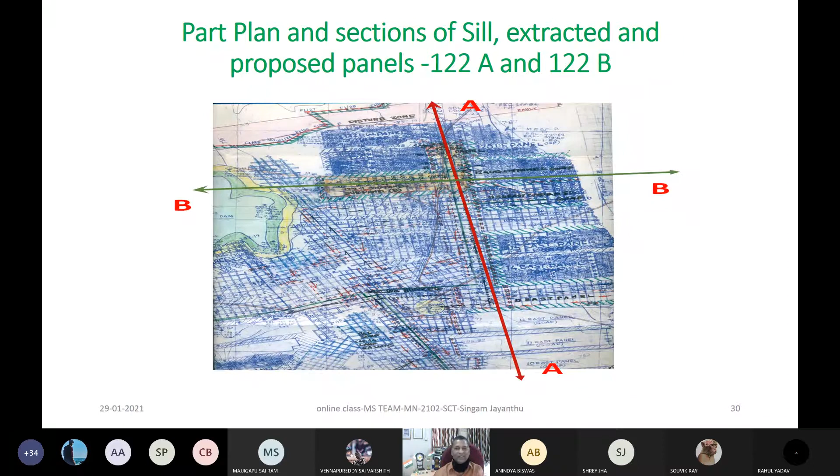That situation I am showing you, where we utilized panels which were supposed to be extracted by longwall, but later, since it was a failure which happened in the 1980s, later maybe in the 90s, and recently also from NIT Rourkela and also from the Ministry of Mines, as a scientist I did a lot of investigations on designing those methods and monitoring. This panel is here, 122 A and B - this is A and this is B, in which I have with me our Computer Science Department and Electronics Department, Professor L.P. Rai and Professor Kila, also as co-investigators, so that I wanted this transdisciplinary, translational, industry-oriented research and applications to be encouraged since my days of 2006 as a professor here and HOD later. With that spirit, let us go further with my students of underground coal mining methods.

Now that section, when you see, this is a sill of about 40 meters to 130 meters. When they extracted these many number of panels, you can see where some subsidence was there, when there was no sill over that.

But on these panels, which are panel numbers 5E, 6E, 7E, generally named after the eastern side, and then up to 10 panels, and later also panel 12, 122A, B, all those things. So we could not see any subsidence because of this.

This sill is nothing but an igneous intrusion into the roof strata. It is almost horizontal or somewhere inclined, that's why we call it a sill, an igneous intrusion. If you consider this as a surface and this is a sill and your panel is here, this sill will not get disturbed, because it is an igneous intrusion, and you are seeing it is about 130 meters thick. You can imagine how strong it will be.

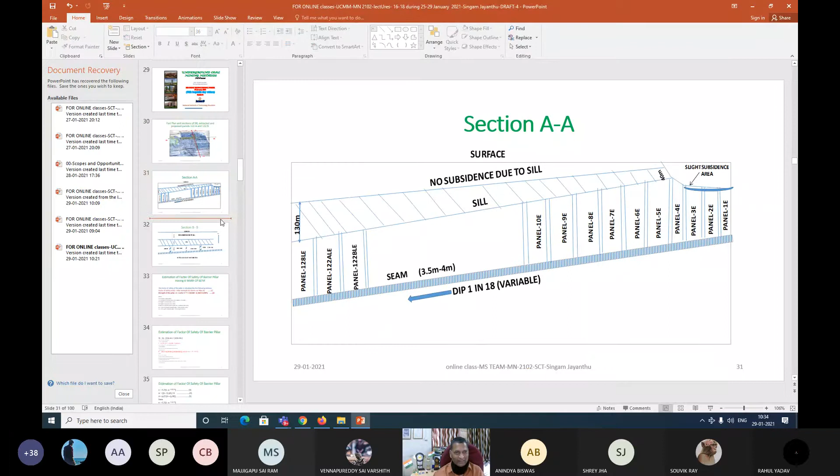And if it is vertical or highly inclined, we would have called it by a different name. That name I am giving you here, because I am also supposed to give some CEP questions so that there may be more enthusiasm in my beloved students.

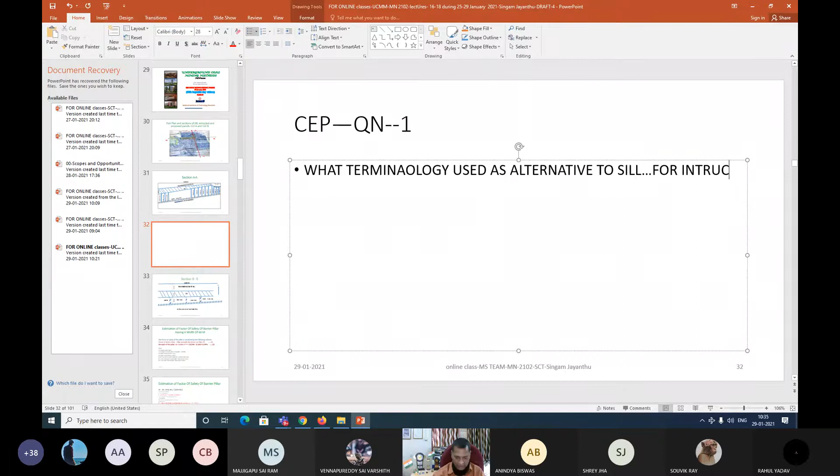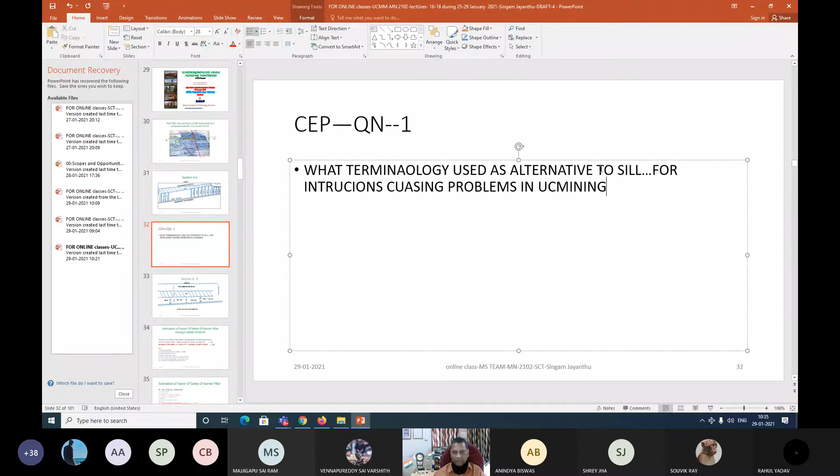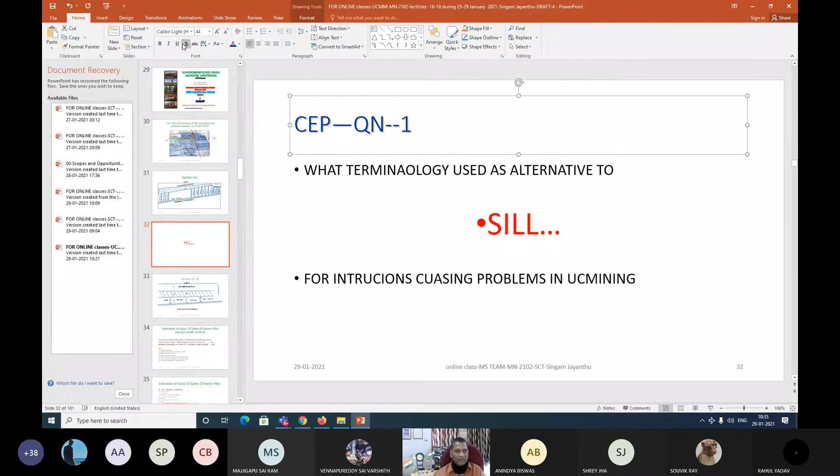What terminology is used as an alternative to sill, since you are already discussing this, alternative to this sill intrusion, because this caused a lot of problems for us. Intrusions causing problems in underground coal mining. So this is your CEP question, and why it happened and what is to be done, all those things you will be telling as a part of it. This is what your CEP question is to start with. I made it so that our beloved students and friends will be very active.

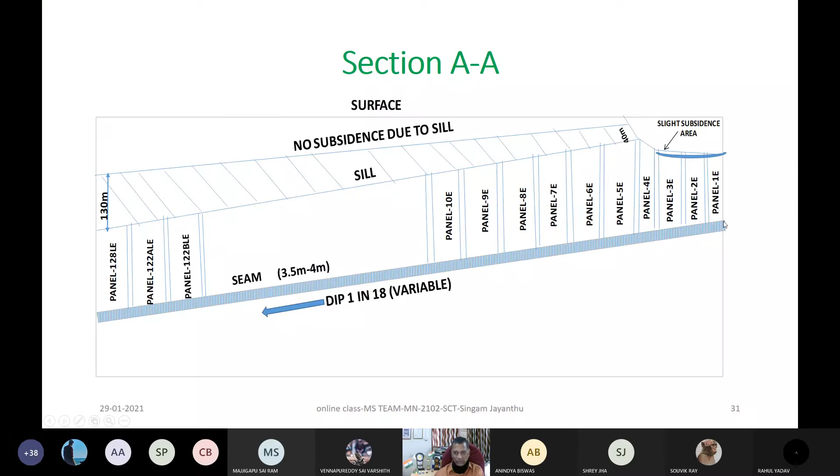Now continuing further, this is our subsidence which did not happen, and another section BB looks like this. This is another section along the dip direction, which is 1 in 18, that is variable, and in the strike diagram it will be almost flat. So there is around 127 meters thickness of the sill here, 117 meters, but still there is about 120 meters in the roof which may get disturbed, and there will be a partial filling of the goaf also depending on the capability.

But if it is not sufficient, while doing these investigations I have given as part of recommendations that you should not be complacent, because after some time, all these panels with goaf, what I am showing you here as blue color is to show a part of your barrier. That's why I kept it, because some part we have not excavated, we kept it as a barrier. That barrier pillar design is also a very important aspect, some of which I will show you here.

But all other details of rock mechanics issues you will definitely be reading as part of your other subjects like geomechanics, in courses in future semesters. But still, if you have any doubts, I will be available again when you come to the final year for strata control technology, MN6142. You may note that down, as I used to explain further when you are left with any doubts, even after reading rock mechanics or geomechanics.

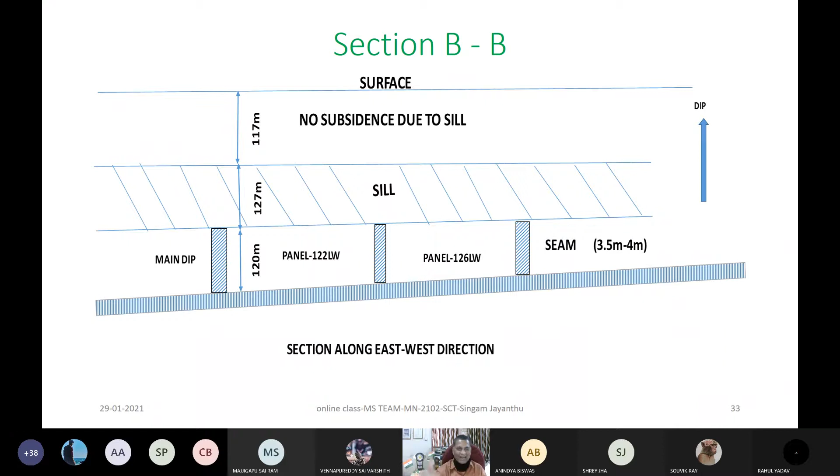To understand ultimately our mining methods and design, and become a part of our Make in India, our Atmanirbhar Bharat, giving new designs, startups, you should come up like that in our National Education Policy 2020, my beloved students.

I don't want to give you and fill your brain with so many equations, because some people give importance to numerical problems, but I don't want you to develop as memory builders. I want you to be problem solvers and contributors in Make in India, Startup India, in future. That's why I give very little importance to equations, but you should know what is available in the literature. That's why I'm showing you, my beloved students.

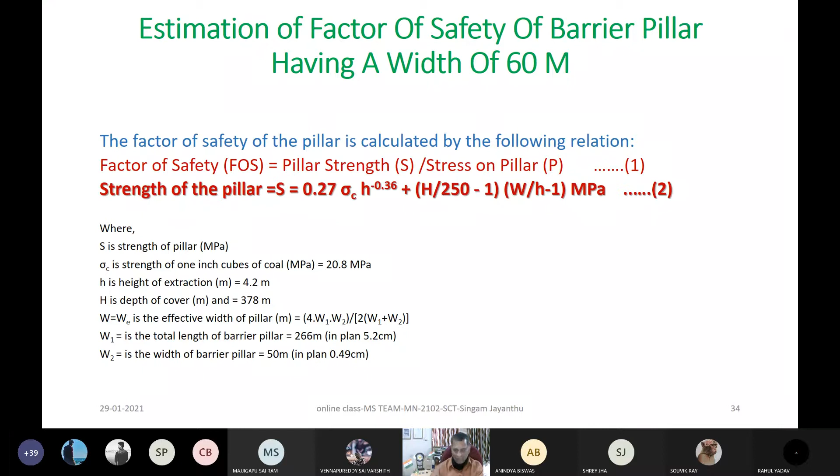This is the equation of strength of the pillar - note this down. It is based on modifications done to existing equations by Dr. P.R. Sheorey of Central Mining Research Institute at that time. Whenever you search these names on Google, you will find a lot of information about these centers.

With all these equations, we get the strength of the pillar and the stress coming on the pillar. Ultimately, the safety factor is calculated with the stress coming at about 9.33 MPa, and the strength of that pillar, for a barrier of length 266 meters with a width of 50 meters.

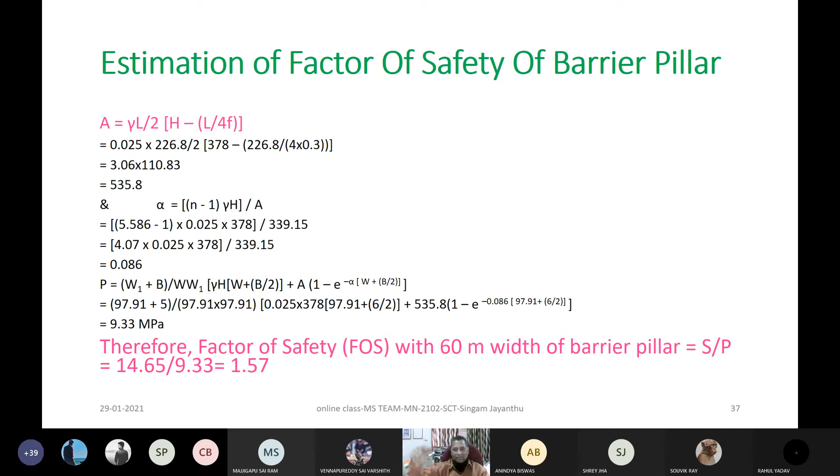This is how the design of any panel is done, and it has more than 1.5 safety factor.

I want to show my beloved students these approaches, although I don't want you to be forced to learn all of this right now. But these are some approaches to how barrier pillars or pillars are designed - you should know about these things. That's why I'm giving you data not hypothetical or from Google or a book, but from investigations we have done over about 3.5 decades of experience in particular mines, which we will discuss after a small break.

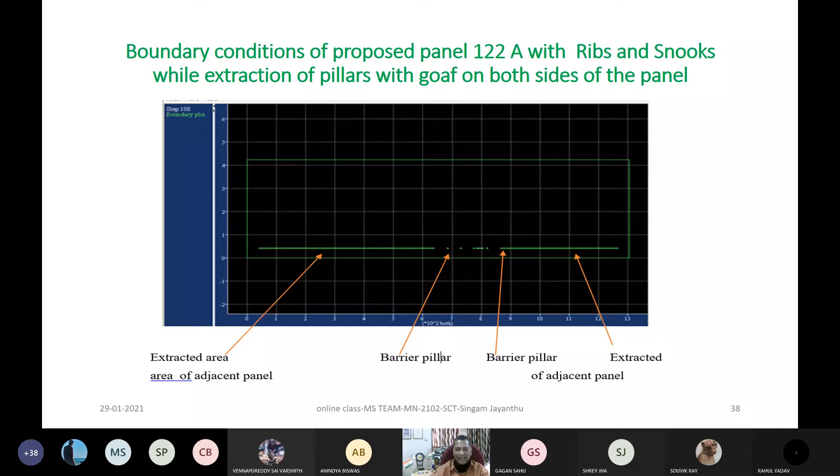I am just showing you how the modeling is done, not teaching you all of it in detail, but you should know about this - at this instance, while designing whether the rib pillar size should be 2 meter, 2.5 meter, 3 meter, or the snook size or pillar size should be of a particular dimension. This is the way how you can understand it.

Now here, I don't know whether you are able to see this. Let me make it bigger. Yes, now you can see - this is after 8,99,739 steps of running iterations of that model, and this is the result of that. This is the YY stress, meaning the stress coming in the vertical direction as far as that mine is concerned with those conditions. Now this value is 1.66 into 10 to the power of 8.

This minus value is showing the compressive stress field. YY means the vertical stress direction, and it can also be XX and ZZ - but YY is vertical. This is the code given in that model.

Those who are interested, from your second year itself you can start working with me in the present projects we have been doing, whether it is KTK5 mine, Orient mine, MCL, as far as underground coal mining is concerned. It can also be our GDK11 mine or Vakilapalli mine. These are underground coal mining related projects we are doing at present. Anybody can get associated and do a lot of things.

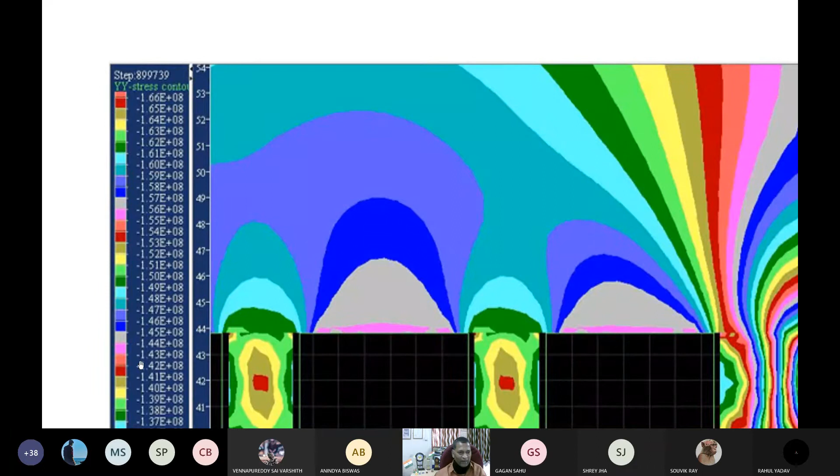Now 1.66 into 10 to the power of 8, this shows this much pascals, right? 10 to the power of 6 is your megapascals. In the sense here it is 166 MPa, right? This much of stress, this red color, it is there at this place. And otherwise this color, the pink, your beautiful pink, it can be around 1.4, so 1.4 into 10 to the power of 8. So this much of stress is acting onto that.

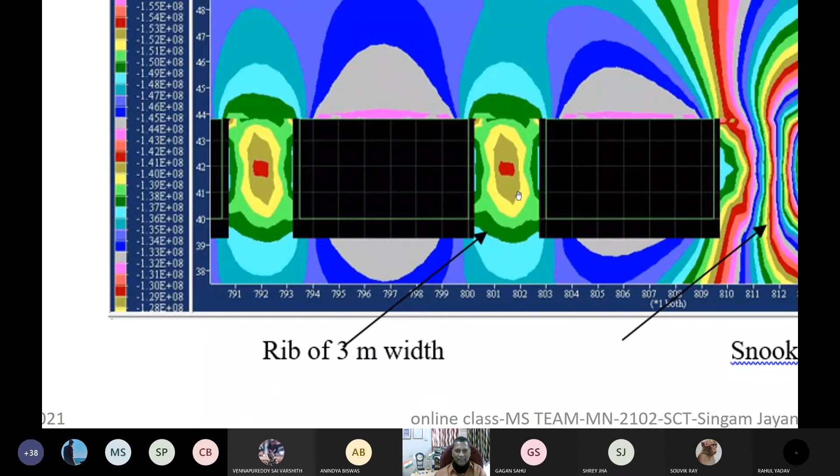And here now you can see the rib is of 3 meter. When the rib is 3 meter, how much stress will be acting? When the snook, whatever you have seen as part of the design of that method, already I have shown you at that time how that panel is extracted by a split, 2 splits or 1 split, making the fenders like slices in the apparent dip or whatever the dip. Then snook left of whatever the size, 5.57 or 6 meter, how much stress and stress distribution. I hope you must be enjoying these beautiful colors, right?

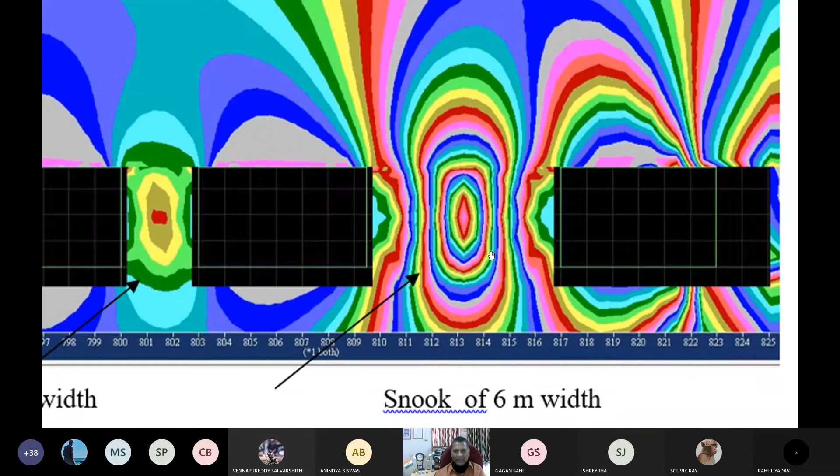Okay, now coming down, these are your galleries, split slices, how it appears in the two-dimensional case. And now I am going a little bit more into another part of the issue also.

Now here in that mine, what type of support systems are used? Since it is already I told you at that time that we are using continuous miner and shuttle car combination, and then that is unloading onto the belt conveyors, and that is a system of mining. And already I tried to explain you through videography of whatever we have done in our laboratory itself, in our mining engineering department of NIT Rourkela, maybe 5 or 6 classes before, how that depillaring and all appears.

So here we used this support system, or recommended or later implemented, that vertical cleats, whatever are there in the sides of the pillars. There it was on the sides kept supported by 3 rows of glass reinforced plastic bolts of 1.5 meter length.

You try to observe here very clearly. I would like to draw your attention, my beloved students, to understand this aspect. That is the reason why I kept it in your beautiful blue color, I know you like blue color, right? Then length of that installed in W configuration and placed at a distance of 0.75 meters, 1.5 meter and 2.25 meter respectively from the roof. Of course, some figures are also there, later we'll see. Then distance between 2 consecutive side bolts are kept at 2.4 meter.

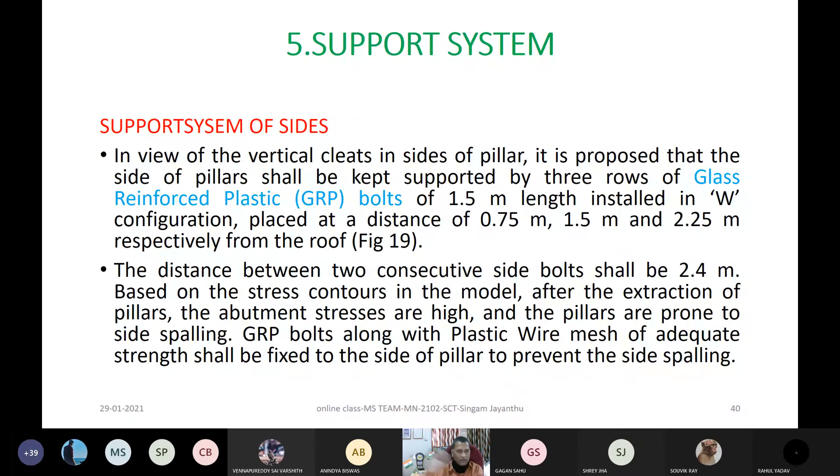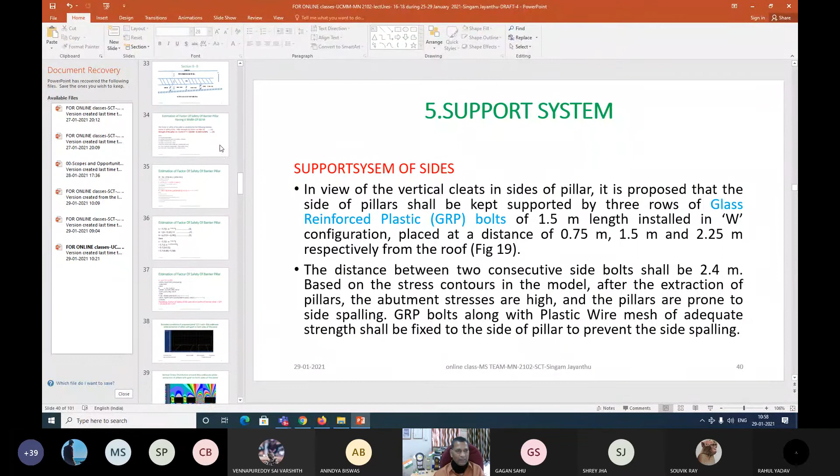And now my another CEP question to you, my beloved students. What will happen? Now here you note down, GRP bolts are used, right? Those things, of course, I will be showing you. And here itself I would like to give you this CEP question 2 itself, now itself, so that you will be feeling very happy to answer. I think I should paste it here instead of copying. So CEP question 2, my beloved students, is: why should normal bolts not be used here? This is not steel. Why GRP bolts are used?

You think over, you get an answer. Of course, in many platforms I used to discuss in a different fashion, and of course today also I kept it in a very beautiful blue color.

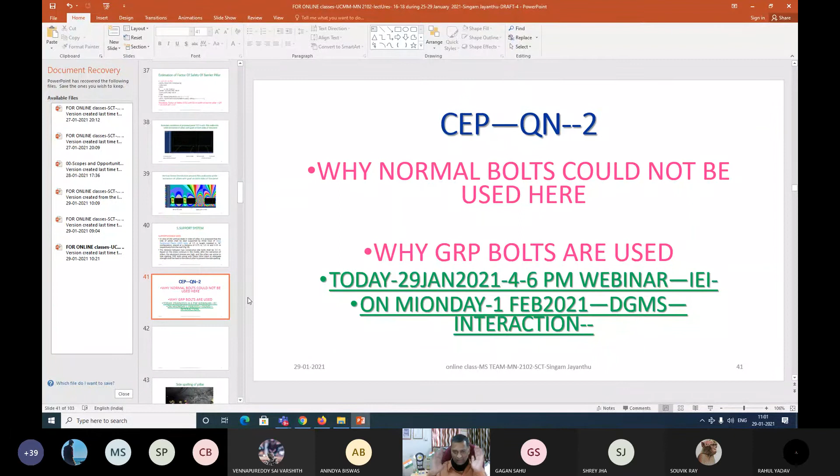And now I am showing you, my beloved students, here.

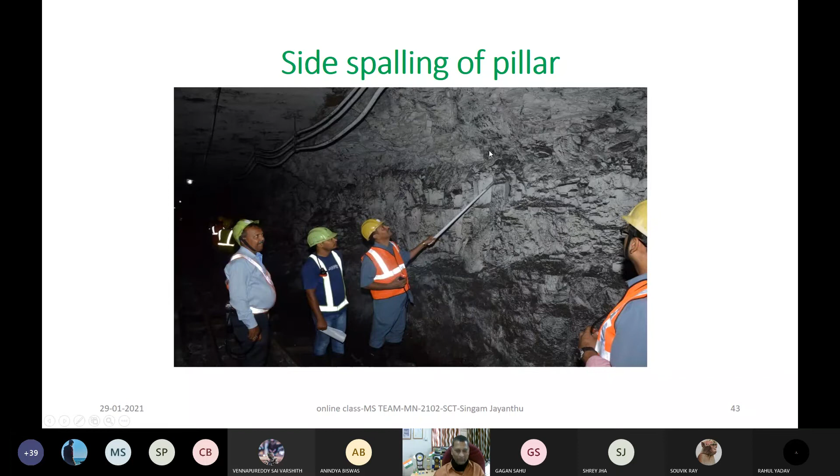This is the way how the side spalling of the pillar was noticed. Now I hope you are able to see how this side spalling, you see along with me.

You just imagine that you are not sitting in your comfortable room or sleeping on your bed watching this. Don't worry, if you are doing that, you may be facing some health problems. Your posture should be very good. We are not teaching only technology, but holistic development in our beloved students. I can say at least for 30 seconds, you should take hot water in the morning. If you want, you can mix with some more lemon into that. And also try to do some yoga, or something like meditation. This is one way for coming out of COVID-19.

So in between, that's why I'm taking this 30 seconds time to show you. And whenever you sit, try to have a good posture of sitting, ergonomic way. Many times we cannot do it, even I also cannot do it, right, but in majority of the cases, now I wish that you are there with me in the minds.

I am taking you to this place in the mind, this method, continuous miners, where we are doing it. This is your southeastern coalfield, where sill is there on the top. Just imagine wherever you are, on my back, behind me. Many times when I send you to the mines, I look through your eyes, that is what we follow. And you imagine sill is there on your top. So that's what I am showing you, that sill is there on the top, my beloved students.

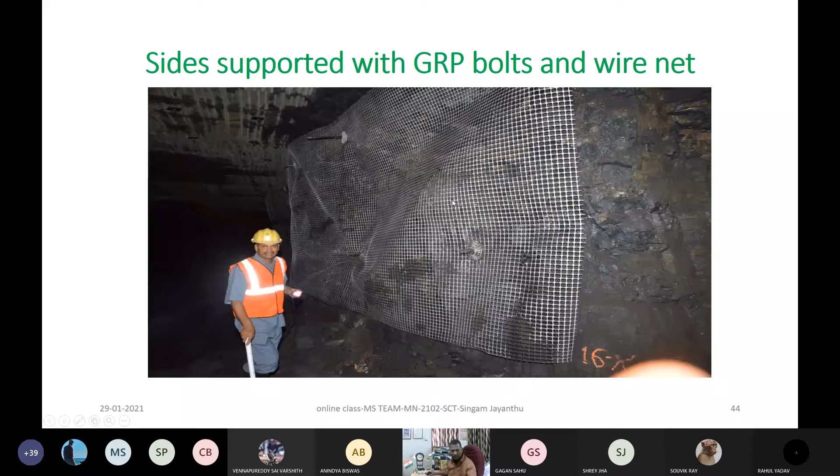Within 2 minutes I will show you something more. This is how the side stitching is done. Now you can see these GRP bolts - let me make it a little bigger for you. Now you can see how this GRP bolt appears, and this is that bolt, and then wire netting, so that whenever there is any spalling tendency, this is what happens, my beloved students.

Next, how it was done in the schematic layout - you can see here. All this is happening because there is very hard strata on the top, and I am giving you once more a caution, not only to you, but to future generations. If you go like this without any caving happening above, or any disturbance to the sill, that may lead to a catastrophic collapse which happened in South Africa long back, which led to the design of the pillars. Before that, we should come up with our Atmanirbhar Bharat new designs for our conditions, right?

So here it is 0.75 meter, 3.8 meters, and this is the way side bolting is done. You are able to see it clearly, so I need not elaborate much on that. This is roof level with 1.5 meter long GRP bolts, and all are used.

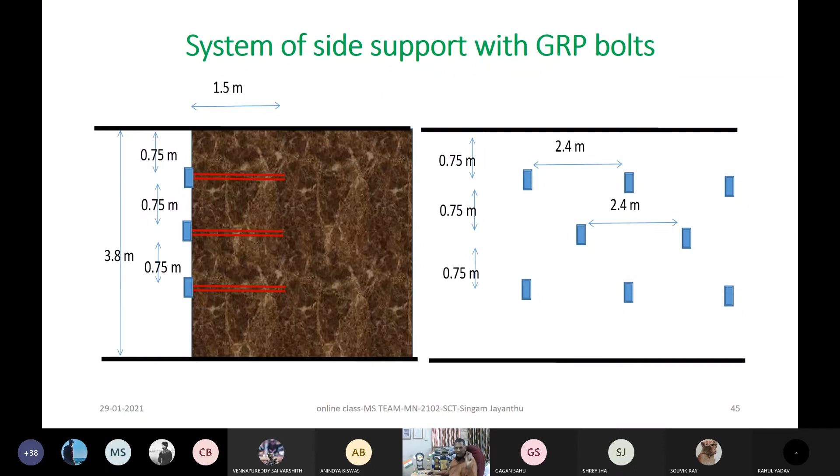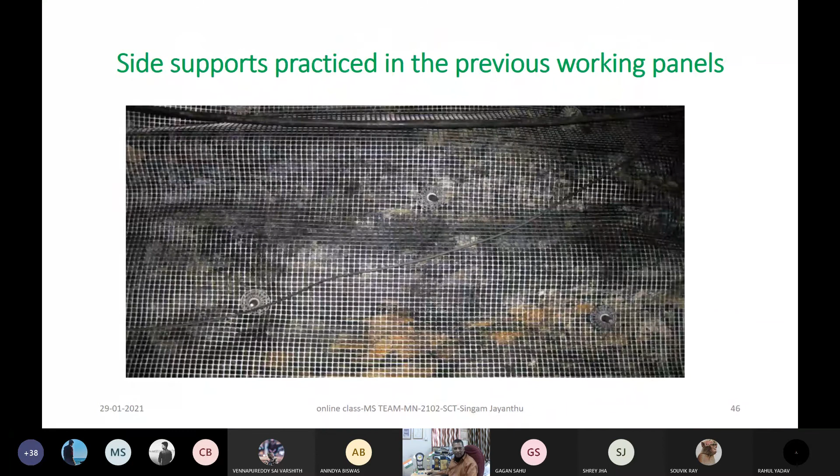Now you see another view - you can see here, I hope you are able to see these. Other views are also there, but other things I will take you through in the next classes. Again, I am showing you how that roof is appearing here, my beloved students, how this roof stitching in other places is done - just to give you some glimpse of how this stitching and other things are done.

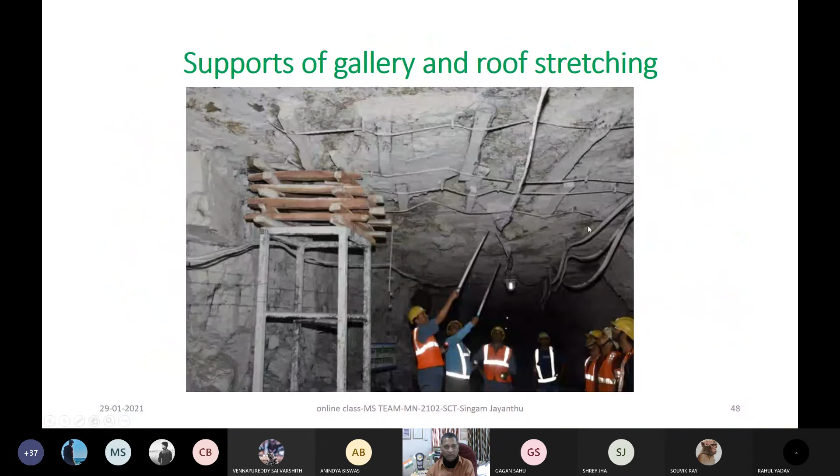mines. Any other answers? Any other want to say? So who is summarizing? Are there any doubts? Sir, can I summarize? Yes. Same person, Gagan - who is summarizing? No sir, Uday is summarizing. Uday, yes, continue.

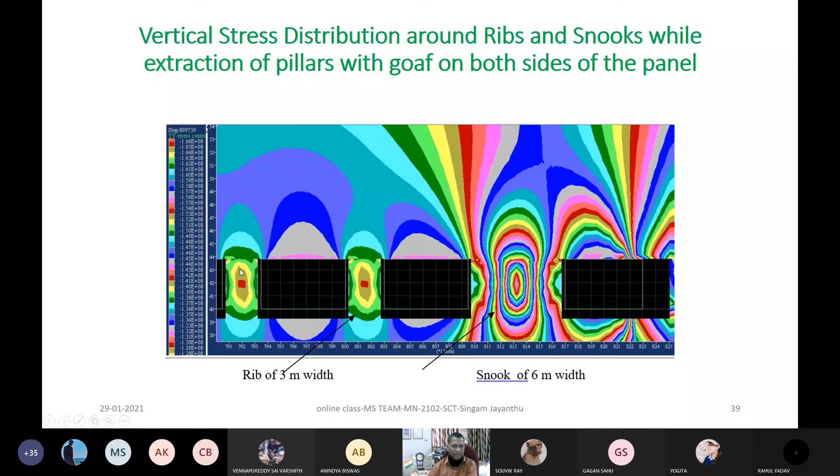Yes sir, very nice. So this is your rib, and this is your stook or snook. Now in this rib, you are leaving a rib of around 3 meters this side. Consider this left side is a rib here. This is a goaf, you are again leaving a rib, and then slicing this. I hope you understood this.